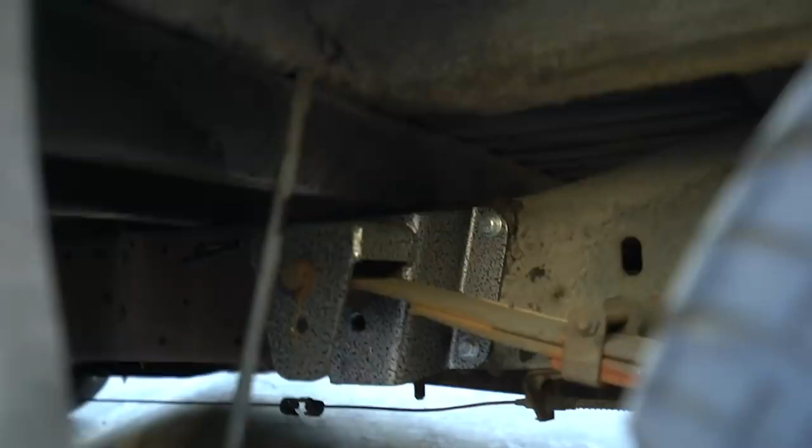So this is my 1974 Chevy C10. I originally picked this up with the intention of building a cool, daily drivable street truck.

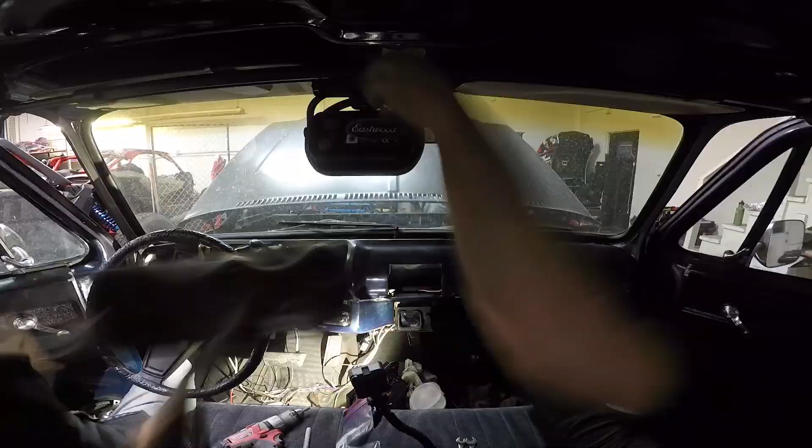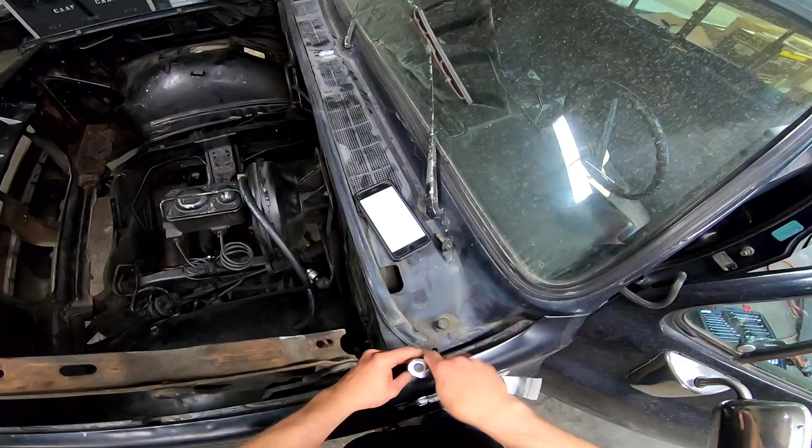Okay, so first things first, we're gonna get this distributor off, we're gonna get the carb off. Engine and trans is out. This was a motherfucker. Ah, yeah, there we go.

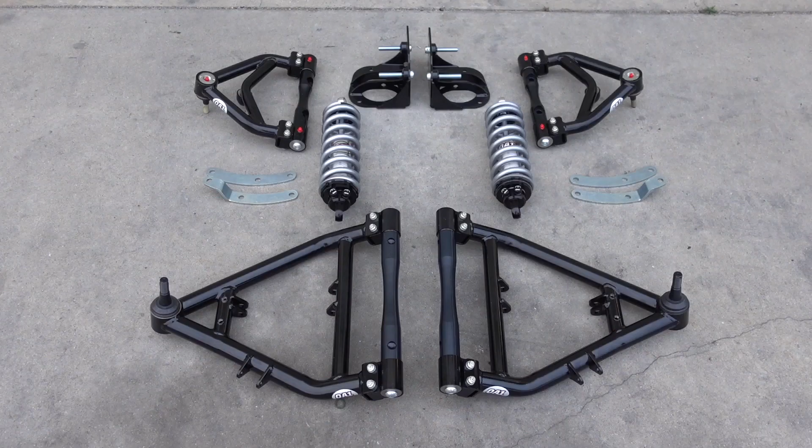It's ready to start assembling the front suspension. We got this coilover kit from QA1, I'm really stoked on this. I mean dude, these lower control arms are heavy, these guys, that's maybe 10 pounds. The actual meat and potatoes of these coilovers, these guys are so small.

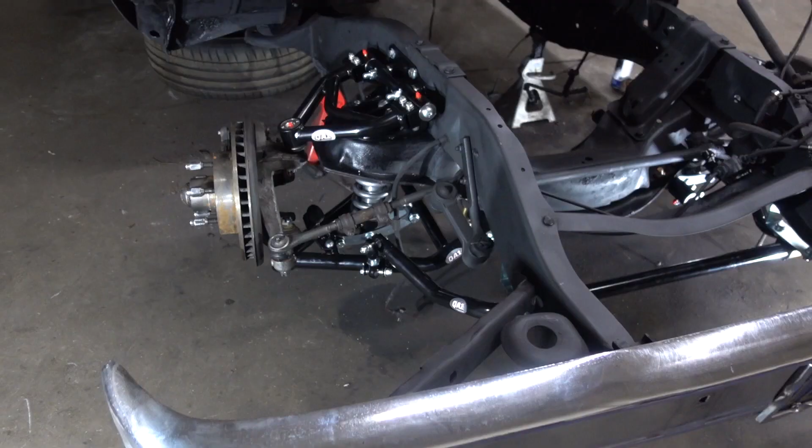All right, so we got everything in. Overall, looks freaking sick.

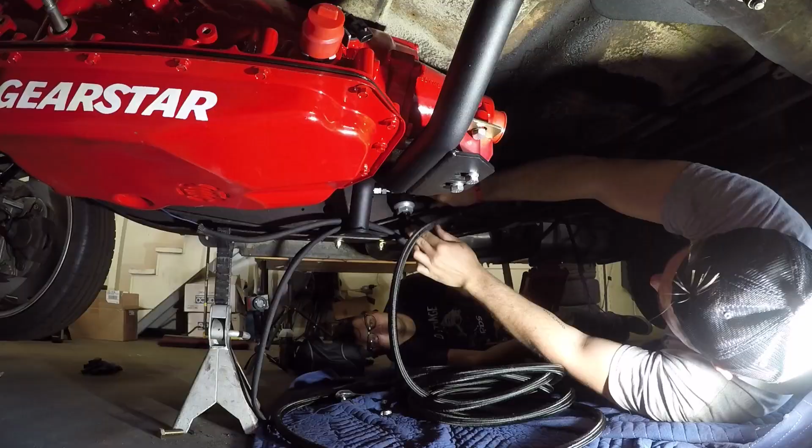Bada bing, bada boom. All right, here we go. Got the line coming up to the rail so we can get everything else kind of buttoned up and then keep moving.

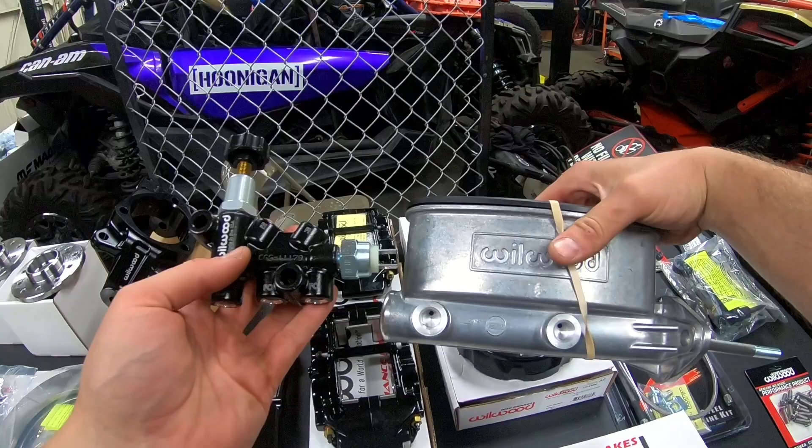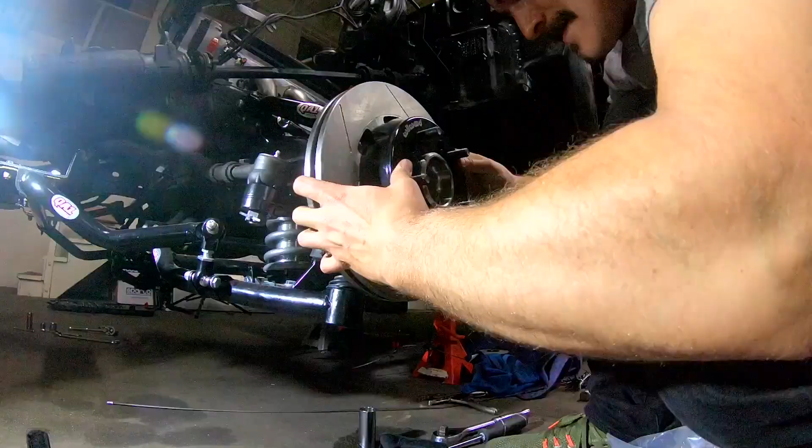Got the spindles, rotors, and calipers all on, mounted up, and it looks super clean. And it's so much lighter, and it just looks so tight in there.

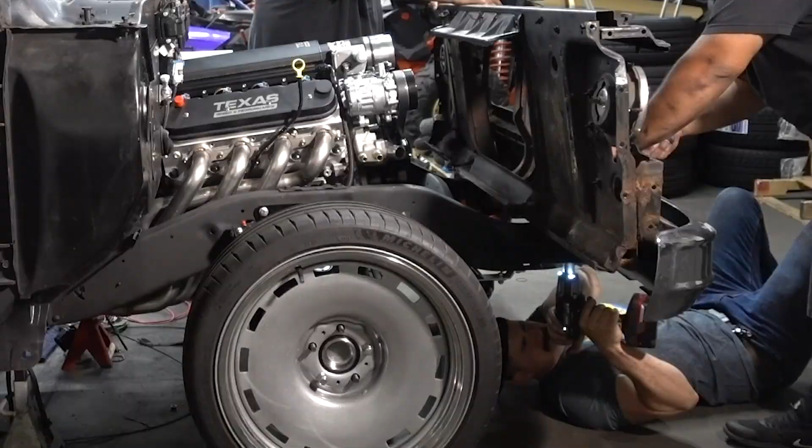Today we're gonna be tackling that rear suspension from QA1.

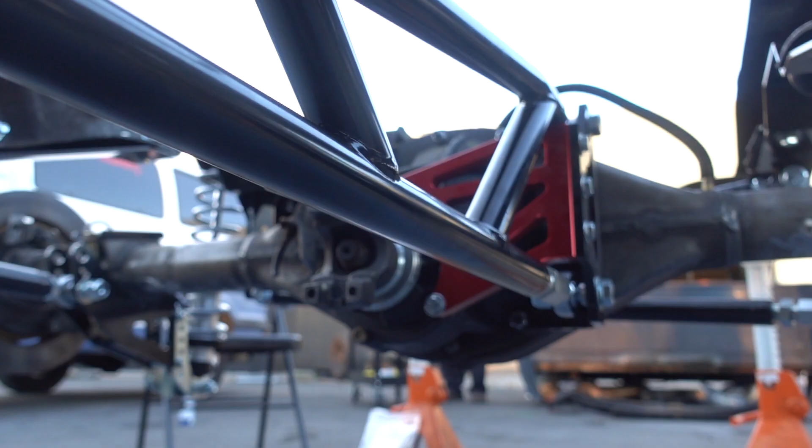All right, this looks sick. Super trick stuff. Now I just gotta figure out how to adjust it all. You know how to do that, Mike? Nope. Oh, okay, well we'll probably contact some professionals over at QA1 to make sure I don't screw this up. But looks sick, pretty simple to install. Everything's super clean, looking forward to ripping in this thing. Hell yeah, bros.

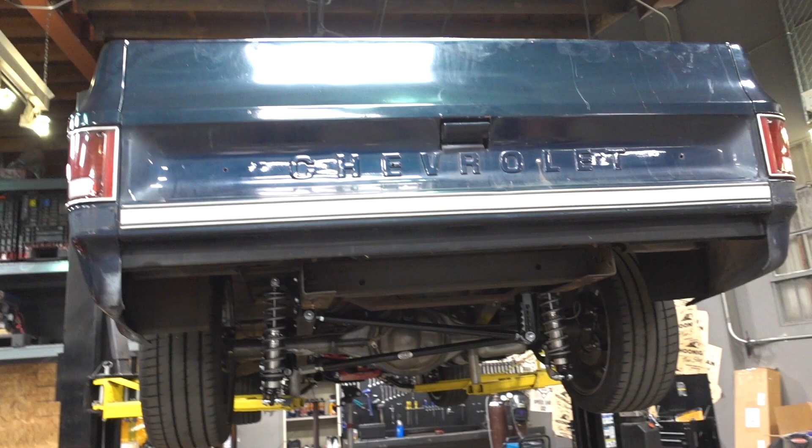This is a set of boom tubes off of a stock car. We want to try to get this thing to fit on the C10. I've got Mr. Mullet Mike in the building to help me out.

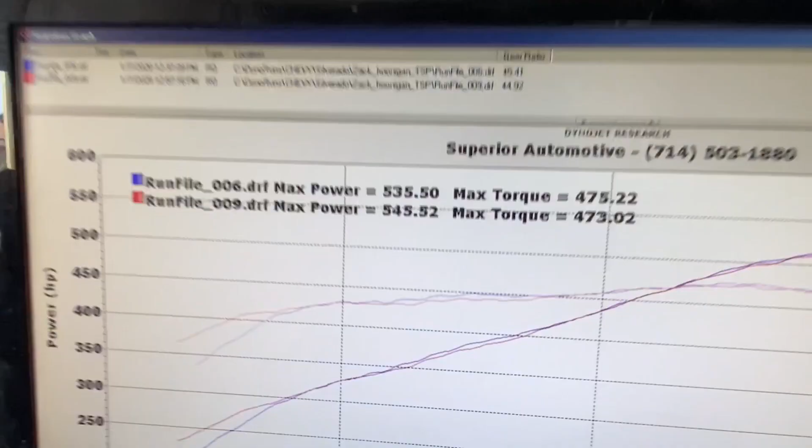Welcome to 550. So that last run, you locked up the converter. We bumped the rev limiter out to 68, 67-ish. The motor's still full and strong at 6,800, it'd probably go to 72. Nice, I like this. So here we go.

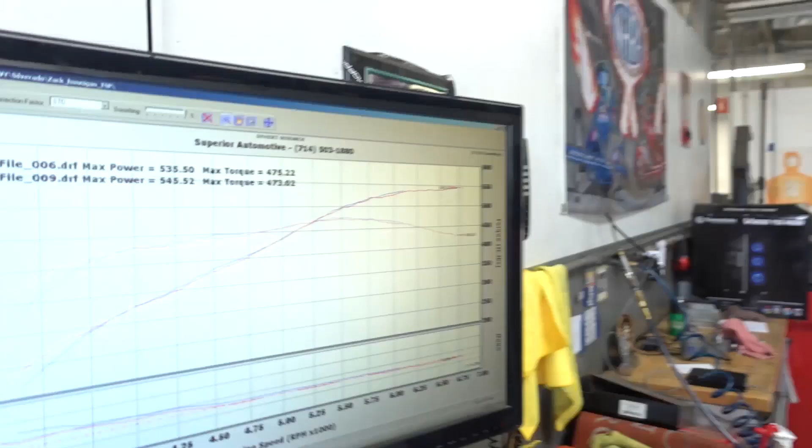545.52 horsepower and 473 pounds of torque.

That's right, we got old Blue back on the lift. We got some really rad stuff that came in. Got this sick QA1 carbon fiber drive shaft. Secondly, we're finally gonna throw a rear sway bar on this thing because I never put one on. I know what you're thinking, it's an old truck, it probably doesn't need a carbon fiber drive shaft, and you're probably right, but you know what? It's a big flex piece, and that's what we're all about here.

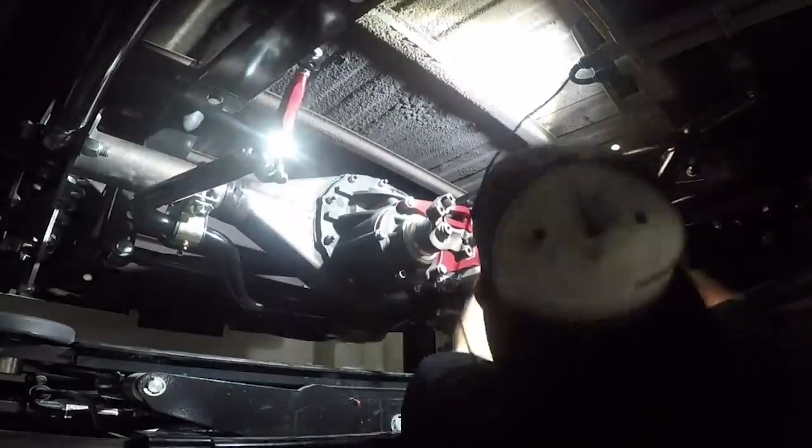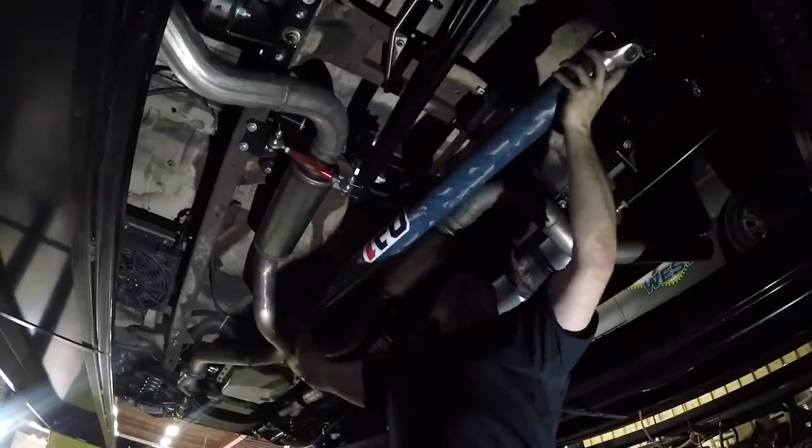Okay, sway bar is in, just gotta adjust it a little bit, but we are good to go on this. Now I just gotta get the drive shaft bolted up and we're good to go. Bam! Looking sleek, fresh as.